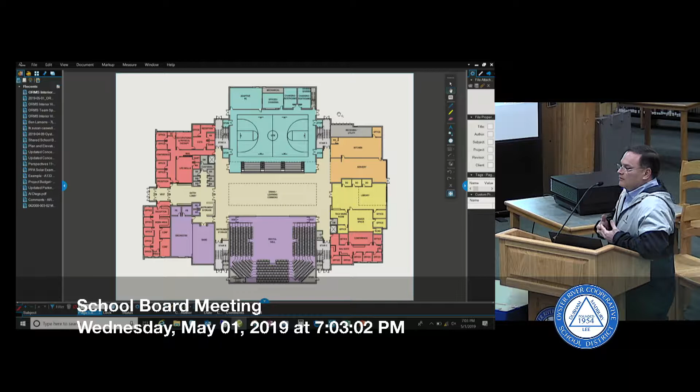Okay, so as we start to develop the plans with the building committee, we're actually starting to look at actual spaces within the building and how the building's going to function. But we're also looking at the character of the interior of the building.

So what you're looking at here is the development of the first floor plan. What you see in red are administrative spaces, and you can see that they're on the three corners of the school. And then there is an office just off of the kitchen that's also basically administrative office. So as we spoke about last time, it gives us eyes on all four sides.

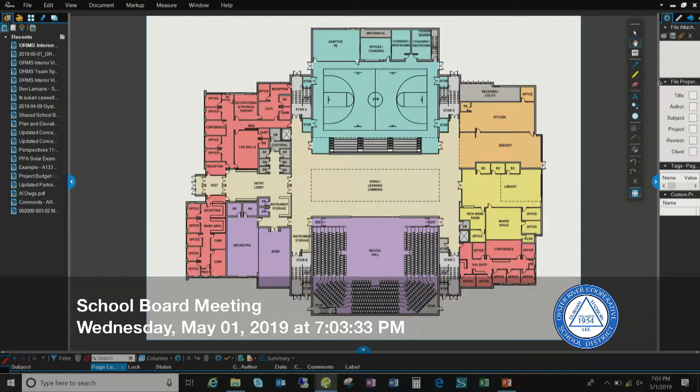Let's see. Maybe I should get out of this so I can just turn the page.

And then as you walk into the front door, some of the character that we've been sort of thinking about is to really create a sense of place at that front lobby, if you will.

Then there's also been a discussion, if you look at the sketch here, sort of towards the back, about actually having a glass wall with some doors that separate the main common area from the lobby space, and that would take care of acoustics and things while the students are eating. It would also allow for some acoustics and another layer of security when the public's coming into the building and folks are there. However, as welcoming as we want to be in a school, you can decide to keep those doors open or not even have the glass wall. It's one of the things that the committee's been talking about.

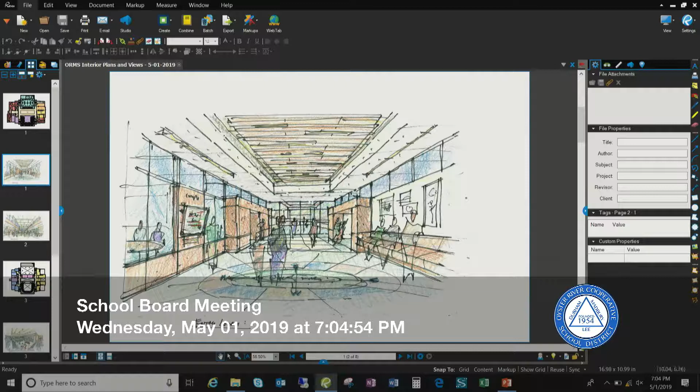But this would be the lobby, with the idea that as you come in, maybe there's a screen on the left-hand side that explains to the community all the sustainability factors and features of the building, a place to rest, and then the band storage, instrument storage that we talked about would be in this area right here. And then on the other side, we have some utility spaces like public restrooms and such.

As you go further into the building, this is the common area where the students would dine. The library would extend out to for all other times of the day when the two dining periods are not taking place. On the right-hand side, you'd be able to see into the recital hall. And on the left-hand side, you'd be able to peek into the gymnasium, but we'd also have lots of display for student work that could go on in that space.

Upstairs, we have two health classrooms that overlook that space. There's a walkway to the balcony of the recital hall. And then at the far end, we would have the library proper itself at the end of the Learning Commons, and then STEM and art up on the second floor, so you'd be able to see those areas as well.

So that common area really talks all about the students and the health and wellness of the students with the phys ed area, the specials, in other words, art and STEM and music and health, and it's all right there in the core of the building as one large extension of the library.

Yep. So a few questions, maybe. That possible glass wall partition, are we now on the other side of it? Yes. Okay, so we're there.

How high up is the space here? Is it 2 stories or does it go up to the... It's 2 stories.

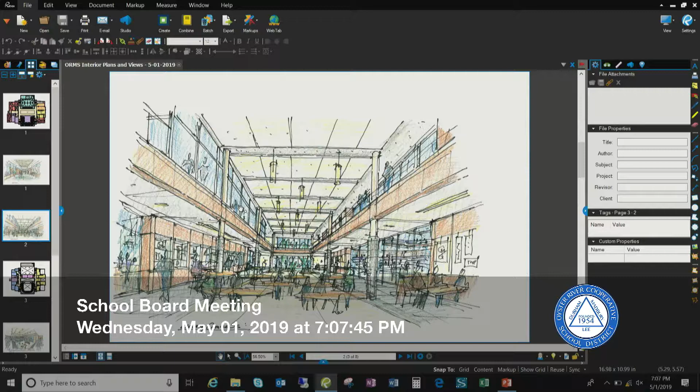Just to continue with the glass to the recital hall, how would that be acoustically within the recital hall, because I'm thinking glass is an unforgiving surface. It's a hard surface, and music bounces off of it. Should be fine, okay.

However, we are thinking of also having a curtain in front of that glass, which is also an acoustic curtain. So in certain performances, when you want that sound to bounce off the back wall behind the orchestra, you will have it open. But in other instances where you want that sound absorbed, we can close the curtain. We can also close the curtain if you're having some other type of presentation in that space, because even though it's designed to be a performance space, you could envision guest speakers or other events where you may want to close the curtains because other activities are taking place in the school at the same time.

So to that point, if we go up to the second floor, we continue with the specials, which is world language. We have some more music in terms of the chorus room, and then our art and STEM areas. But the balcony is also accessible.

You may also notice, and I want to point out that we've been talking about having two elevators in the building. The two elevators do two things. First, it gives us an elevator on the public side of the second floor, so we can lock down the rest when the recital hall balcony is being used. But it also cuts the distance in half for any student on crutches or in a wheelchair, or any faculty member who may need assistance at any point during the year.

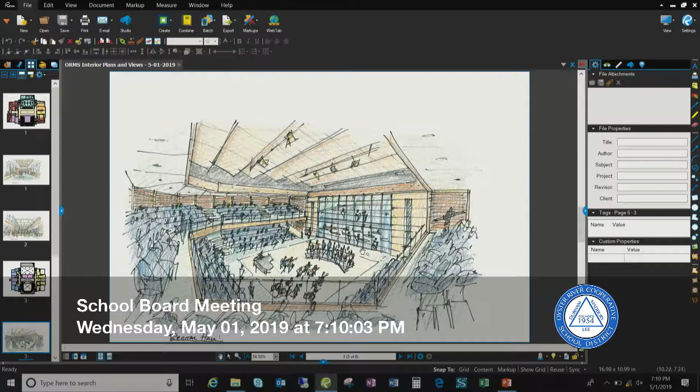It really cuts down the distance they need to travel to get to an elevator. That balcony and the glass wall you were just mentioning, the recital hall may take on a language similar to the rest of the school, but in many ways reflect music. If you imagine that glass wall there, which looks into the common space, we would have curtains that close for both acoustics and vision. The balcony itself would look down onto that performance space. We talked last time of not having a stage, so by not having a stage, you really focus everybody's attention down to that central space where the performance takes place. What you see here are some clouds and some lighting, and again, it wouldn't be designed for drama, but specifically for music events.

Can I ask you a question about this design? When you build a performance space, the biggest thing is to have good sound coming back. The most common design is to have it curved and then tiered down so the sound comes out. If you look at this design, it's almost in the round, so the people on the sides are actually behind or looking from the side. I'm questioning what their sound experience would be like.

And then the second thing is the problem with the glass wall: if you decide to use it as more of a multi-purpose space, like if you're going to have video behind it, there's no way to do it. Most of the theaters I just toured had, in fact, LED screening behind the stage instead of glass, which allows it to be more multi-purpose. I think this design kind of limits your options in some way.

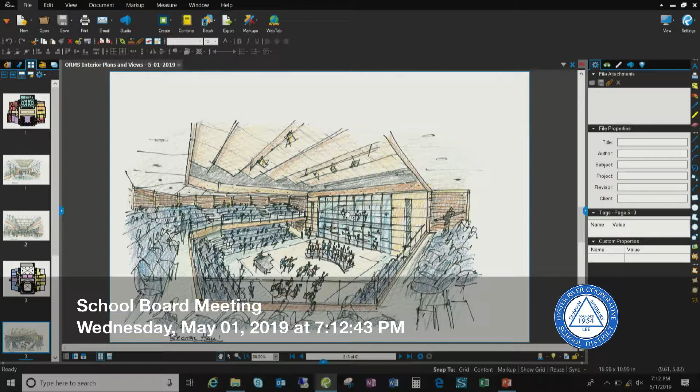They had a main display where the big glass window would be, and one to the side. But the concern I still see is that you're literally behind the band at those upper tiers. During a performance you're going to be craning your neck the whole time. Those side seatings are more like arena seating than a performance setup. Is there any way to pull them back so you're still in front, or do you have to push the band back to the window, or tier the seating? Because those sides really aren't great setups for a performance.

Right, and I think you're correct. I think what we'd want to do, if this were filled with the full orchestra, is have them up against the back, up against the glass, if you will.

I've been to Fenway, but not during a concert, although I would have loved to. Don't go sit in right field for Jimmy Buffett, but that's another story.

We do have tiered seating, so you're at floor level and the seating immediately starts to rise. If we go back to the plan you may see the proportions better - the space is really out in front of the glass, and the seats are back a ways. Having said that, we can do some more renderings, give more thought to everything you're talking about, and work with the acoustic engineers and recital hall engineers to make sure we have good sight lines.

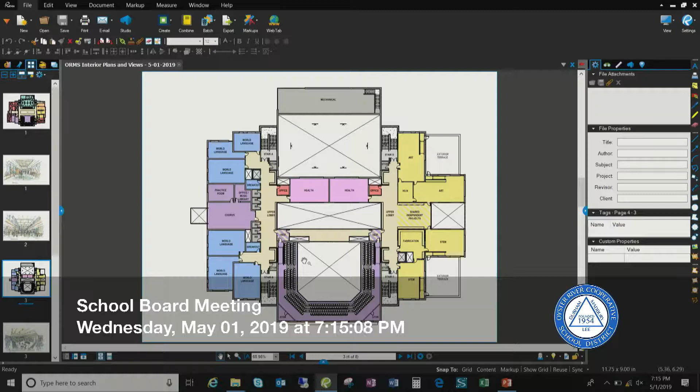So it's interesting - maybe we could present different types of recital halls and how they work, since a lot of them serve both drama and music. For ones that just focus on music, we also visited the new Boston Conservatory building, next to Berklee School of Music, and they had a similar space where you sort of go around the orchestra when they play. So definitely good comments, and it's something we'll continue to develop as we move forward.

Just as a follow-up, I think those points were valid. Right now music is certainly primary in our middle school, and we build something to reflect what's primary, but I think we also want to build anticipatorily and be able to accommodate other needs. I hope we're not shortchanging drama to satisfy current music needs, because just as music is something we emphasize - we changed our program and brought in a strings program - there are also advocates for drama in our community, and that pendulum might swing. If we have a space designed for recital that's not functional for drama, I think we'll be kicking ourselves 10, 12 years down the road.

So I think, to Al's point, we want to make it really good to listen to a performance, but I think we should design in an anticipatory way to meet other needs and not lock into the current situation, but look to the future. Does that make sense?

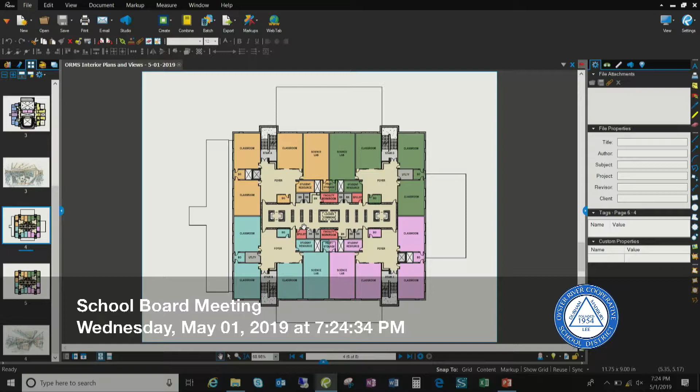And then the fourth floor, obviously, is exactly the same. And what we've talked about in that student common area was another glass separation.

So that the team areas are acoustically separated from the student commons, yet they're very secure because we have lots of eyes on the student commons from all 4 teams.

And we would distribute student storage or locker space around the student commons. You'd be able to come out from your team into the common area to do whatever you've got to do without actually leaving the team, because you'd be visually connected with everybody.

And we understand we're showing a lot of glass in these renderings right now, and that's going to get toned down. But what we want to show is where's the priority for the glass.

Because what the glass does is it allows the visual connection between all these spaces and lets in a lot of natural light. So you can imagine the 3rd floor being similar, and then here on the 4th floor...

We considered at the committee level having all of the student storage locker space -- think of these as phenolic lockers, so when you slam them, they don't make noise, they just close.

All of those in the middle would be low lockers, so you'd be able to see over them. And those low lockers provide counter space for yet another breakout area.

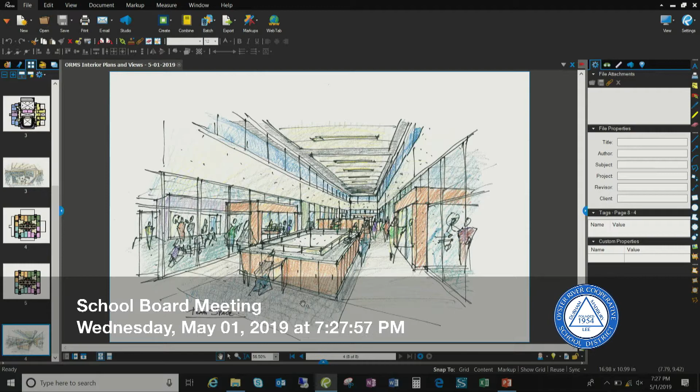That's essentially because we've all been talking about the site, and we do have our civil engineer now working on the site to consider the amount of asphalt, which was a comment we heard at the last meeting, and to take care of the grades, because we talked about those grades that come down. So we're really trying to dial into the site itself.

If that's enough for this evening, we are just now starting to work on the energy aspect of the building. We had a great meeting with Jay and Jim to talk about how they use the building from an energy scheduling point of view. We're putting together a basis of design with some options for everybody to look at in terms of how the building will operate, from the heating system to the cooling system to domestic hot water, anything that uses energy.

One goal is to do an all-electric building for the net zero ready target, if you will. Another option is to have some amount of fossil fuel. We can talk about the pros and cons of that maybe the next time we're here.

We do have the beginnings of a presentation we'd like to share with everybody in the next few weeks. The next step is also to meet with the faculty and students again before they leave for vacation, to give them an update on where we are, and to receive feedback and comments so we can work on that when they come back in September. They can take a look at that. So we think about 2 weeks from now, 4 weeks from now for your next visit to us?